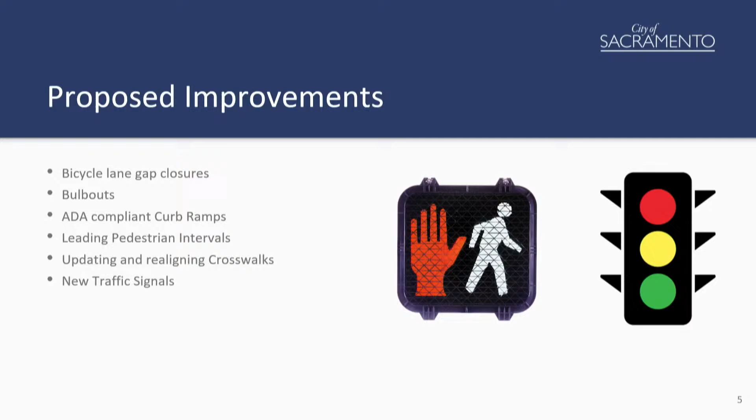Staff has deemed that there are limited crosswalks, which this project aims to fix. Proposed improvements include bike lane gap closures, bulb outs, ADA compliant curb ramps, leading pedestrian intervals (LPIs), updated and realigned crosswalks, and new traffic signals.

I start off with location 2. Location 1 was taken care of through another project where they updated ADA ramps to standard and also implemented new traffic signal equipment.

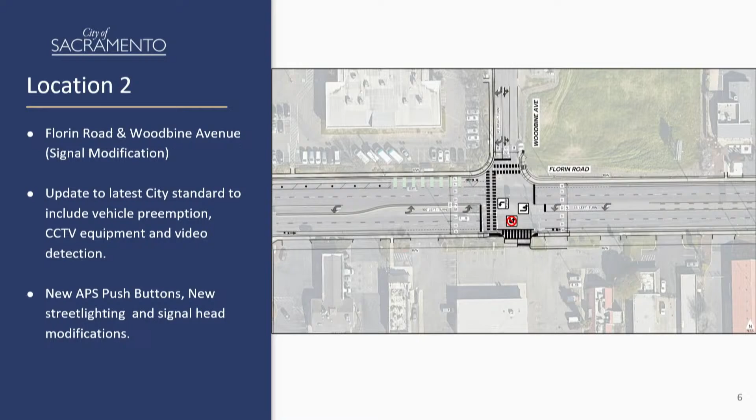With location 2 being Florin Road and Woodbine Avenue, some of the main improvements in this intersection are new APS push buttons being installed, new safety lighting to help illuminate the crosswalks, and some signal head modifications, specifically pedestrian indications, to be updated.

Location 3 is Florin Road and Loma Verde Way. This will be a brand new signal installed along Florin Road. There will be new crosswalks, new ADA curb ramps, and eastbound and westbound U-turns at the signal will be restricted.

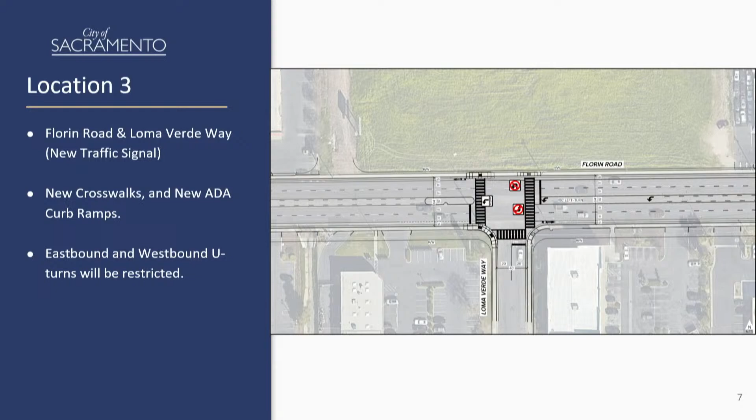Location number 4 is Florin Road and 29th Street. This is a signal modification, and one thing to note is there will be implementation of protected left turns for Indian Lane and 29th Street. The phasing timing will be a little different, but it will help improve the safety of left turns coming in and out, or going onto Florin Road.

Location 5 is Florin Road at the railroad crossing. They implemented 2 new crosswalks on each side of the tracks. On the west side of the tracks, it's supposed to service the RT bus location just north of the crossing, and for the east side, it will service Luther Burbank High School.

There was a little bit of back and forth trying to get this design approved, but we managed to get it in. There will be a pedestrian refuge median as well. Another new design element for this railroad is that it will act as a queue cutter, meaning there will be detection along eastbound and westbound traffic, so there's no cars being queued along the tracks.

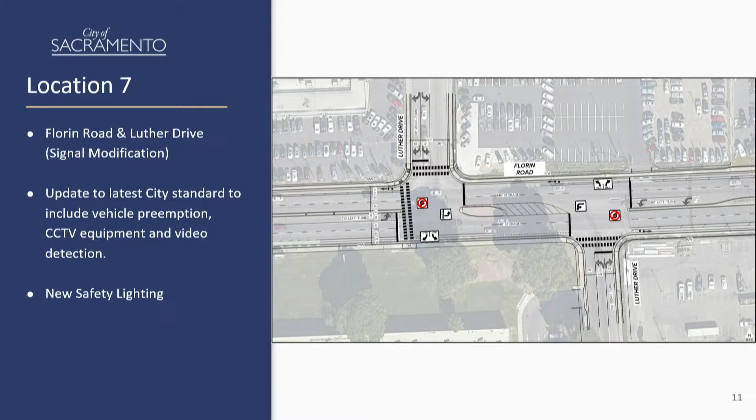Location 8 is Florin Road and Munson Way. This will be a pedestrian signal. It will reconstruct a little bit of the concrete median currently at the intersection. We would like to have a pedestrian crossing there at the west side, and in order to keep the south crossing safe, we will be signalizing the left turns going onto Munson Way so that there is no conflict occurring at the south crosswalk.

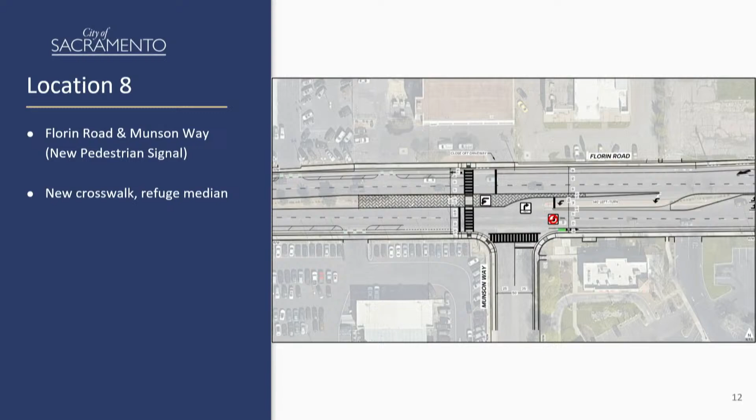With that, it would include some new ADA ramps, some push buttons as well, and there will be push buttons also placed at the refuge median.

Location 9 is the final location. It's Florin Road and Franklin Boulevard. The main focus of this intersection is the implementation of the closure of the bike lanes, and that's because we are expanding to the north on Florin Road, about 400 feet, a little over, to be able to close the gap of the bike lanes.

The county did a bike lane project along Florin Road heading east, and there was a stretch where there were no bike lanes, then it jumps into another Class 2 bike lane. So the city decided we will obtain a little bit of right-of-way, expand the road so we can implement bike lanes and close that gap for bicyclists. Along with that, there will be new traffic signal equipment to realign the signal heads with the expansion, along with new pedestrian push buttons and street lighting.

There will also be a repurpose of the right turn pocket at the bottom, originally a straight-through travel lane. We decided it would be best to convert it into a right turn pocket and highlight the bike lane implementation to make it flow better and have connectivity going east, with a green bike lane treatment.

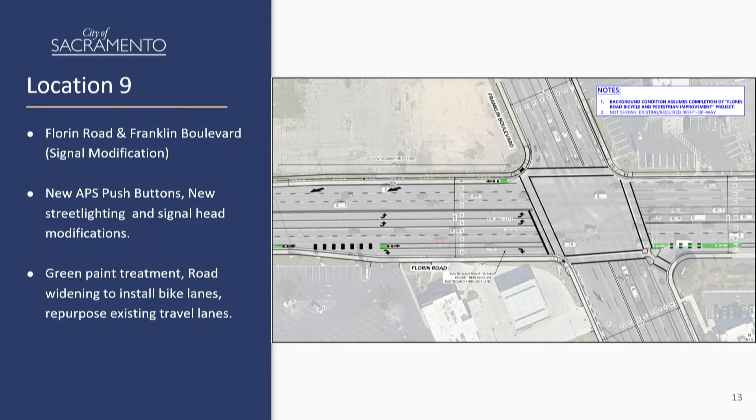This is a little bit about the project timeline. The design and right-of-way will be completed by February 2027, and we will be going into construction in July 2027.

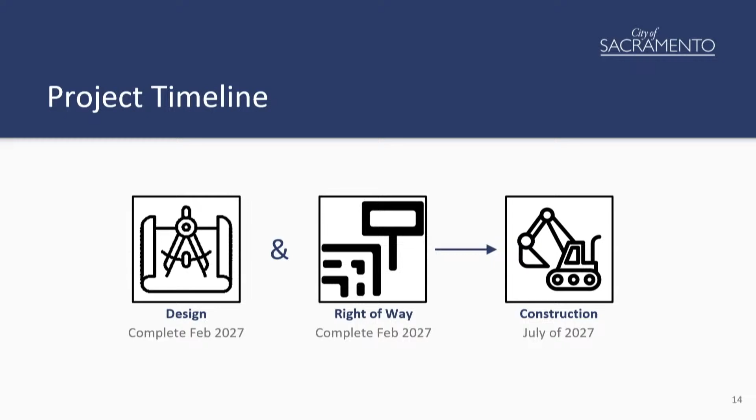Thank you so very much for that presentation. Before I turn over to my fellow commissioners...

For the crossing on the railroad, I just have little concerns about the rail safety. Is that railroad line still active or is it deactivated?

Can you rephrase that, please? Okay. Because if it's active, my concern is about mobility devices getting stuck on the rail lines.

Oh no, there's advanced detection being placed, so that cars will always be funneled off the tracks, so there's not the issue of queuing when train tracks come in. The idea with the detection is purely to make sure there's no queuing along the tracks, if someone using an ADA mobility device is crossing the road.

So you're talking about across the tracks specifically and not across the street, right? Would we be able to pull up the slide?

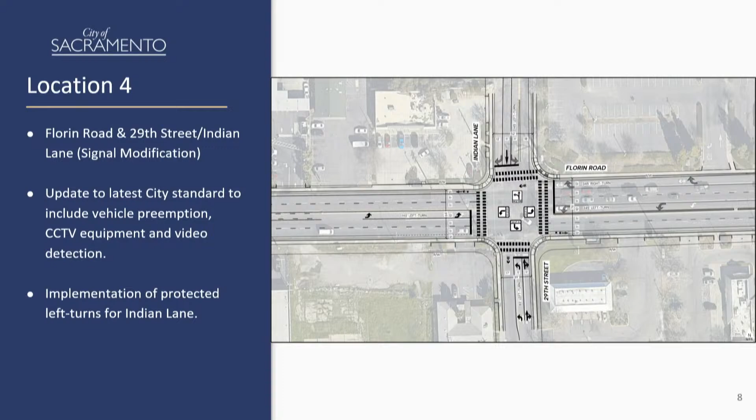Okay, so to answer your question, let's start with the color. Typically with the MUTCD, a lot of the color predominantly being used is white, but you may see some instances where the crosswalks are yellow, and that's usually because a school is located nearby. So those are typically the two colors you're going to see. Now the styles—you can see the 4x4x4, I think I have a slide on that actually. It kind of looks like little bricks with spacing in it. There's that style, but I know the city, as of lately, in a lot of our projects, we're progressing more to a ladder style, which is the longer vertical lines you see along the crosswalks. Going with that route, we believe that gives the best visibility to drivers when approaching a crosswalk.

Gotcha. So that kind of leads to my second comment. It was hard for me to picture this in pieces, so I pulled up Google Maps. What I wanted to see, or was hoping to see, is that all the crosswalks around the school are being upgraded, that we're not just doing one or two. And they are—so 6 and 7 are the whole high school piece, right? It's that corridor. I would highly, highly recommend, for the notes, that those are yellow.

But additionally, there have been some—because this is for safety, right—there have been some safety upgrades in our city that have done the lower level, and then we go back and we go back because it's still not safe enough. The corridor of Club Center and Banfield in North Natomas is a great example of that. Unfortunately, there were 3 lives lost before we got to the level upgrade that we are at now. I really think the corridor of Club Center and Banfield is a model of what safety should be, especially when students are present.

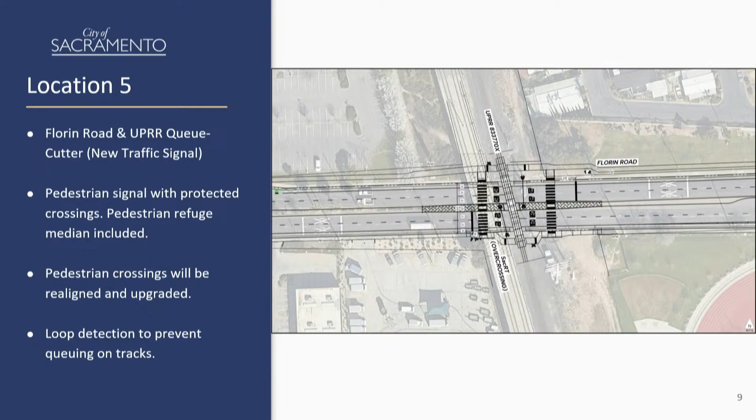When we look at that option, but then also location 6 and 7 have something in the center of the road there, it's a great opportunity to put those bars, which increases the visibility. There's reflectors on the top, and you're going at it at safety. So we should do a small cost when we're in a project to make it as safe as possible, especially when high traffic of students are present in a busy time of day.

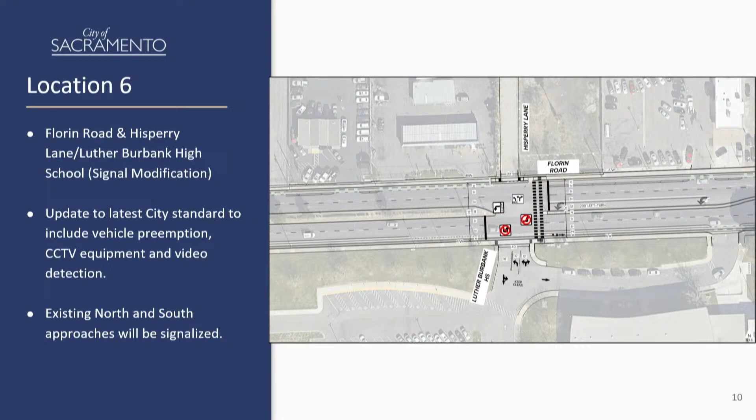Just some recommendations that I have on that. I do think that corridor, and the neighborhood, I think, helped kind of fund that because it just wasn't safe enough, and the efforts of the white wasn't good. And so then we went to yellow, and now we're at the level that it is very safe. Everybody slows down, and it should be sort of the model when we're going in for safety, because the cost of 3 times versus let's just throw a couple extra bars where we're already in construction is, I can only imagine, vastly different for our city.

Okay, but then my other question was the signal modification. Can you talk more about what that is? You might have said it initially, and I was just taking notes, and maybe I missed it. But for 6 and 7, there were a few things, but what is the modification that is planned there?

Okay, so for number 6, we'll start with number 6. There's an added phase, meaning allowing another leg of the intersection to be actuated, is the term. So out of Hisperry Lane, I think currently as it stands, it's not signalized. So it's kind of treated like a stop, and then look left and see if everything's okay, and then turn right. But in this instance, you will see a red ball, and you're gonna wait for that green light to come in and be able to choose which direction you'd like to go, right or left. So that is the modification that's being done there.

So the State Capitol Annex project, which is going to be constructed around the same time as ours, probably just slightly before, is currently in design. The State Capitol Annex frontage improvements are shown on this slide.

The top view shows L Street between 10th Street and 11th Street at Capitol Park. The existing road is a 3-lane, one-way road, although one lane has been blocked for quite some time due to annex construction. Between 10th Street and 11th Street, the annex project will maintain 3 lanes of traffic with a buffered bikeway, but the remainder of the project will have 2 traffic lanes and either a buffered bikeway with delineators, raised concrete median, or parking protected bikeway. The Capitol Annex project will upgrade the traffic signals to APS signals as well and upgrade curb ramps.

The bottom view shows N Street where the Capitol Annex project will reduce 3 lanes of traffic to 2 lanes and install parking protected bikeways, APS signals, and upgraded curb ramps. I just wanted to show that to give a picture of what the state is doing and how our project will tie into it.

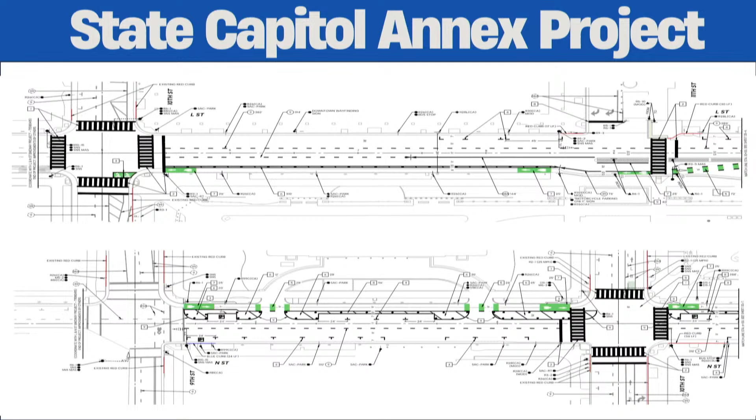This project will remove one lane of traffic where there are currently 3 lanes to create space for a 6-foot to 7-foot parking protected bikeway. The project will update the Class 2 bike lanes where the road is 2 lanes. The traffic signals will be upgraded to include APS, including countdown ped heads, new APS push buttons, and ladder crosswalks. The project will upgrade all non-standard curb ramps to be ADA compliant. The project will incorporate green conflict pavement marking at driveways and other required locations such as bus stops. Loading zones will be identified, and the design will make sure loading zones are accommodated with the project.

The project is early in development right now, and the design of the extension of L Street down to Alhambra Boulevard has yet to be designed. We are currently working on a council action to award grant funding and increase the scope of the project. So we don't have a design for that section yet, but I'll be sure to take your comments into consideration.

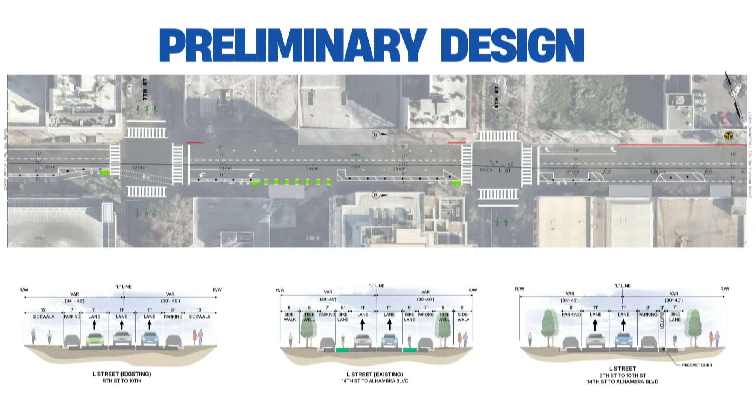The traffic signals will be upgraded to include APS, including countdown ped heads, new APS push buttons, ladder crosswalks, upgrade all non-standard curb ramps to be ADA compliant, and again incorporate green conflict pavement markings at driveways and other required locations such as bus stops. So similar improvements for L and N Street.

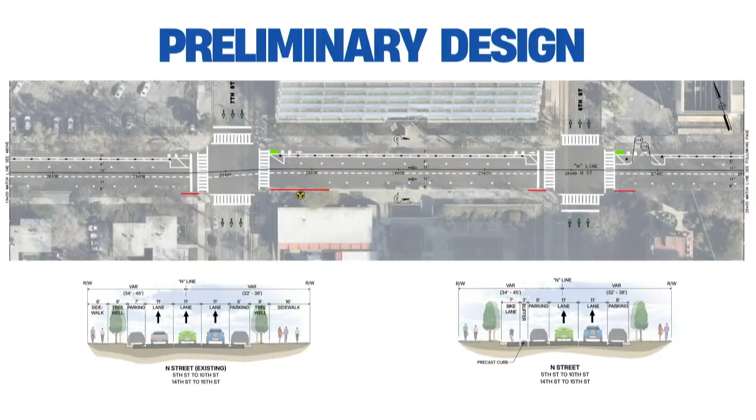This project was initially funded locally by the city's Transportation Corridor Program. The funding was intended to cover the initial scope of work from 5th Street to Capitol Park and from 14th Street to 15th Street. Last spring, the California Department of Housing and Community Development issued a notice of funding availability for the Affordable Housing and Sustainable Communities Program, which is AHSC. The city partnered with Community Housing Works, which provides affordable apartment communities,

on a grant application that would assist the I Street apartment development and allow the L and N Street Bikeways project to increase in scope. The project was awarded $3.4 million, and that's how we were able to add this additional work down to Alhambra and the additional APS at intersections and curb ramps and those type of things. We're working on the cost estimate. Again, this project is very preliminary at the moment. So we're working on the estimates, but the current estimated construction cost is anticipated to be approximately $5 million, around $5 million for now.